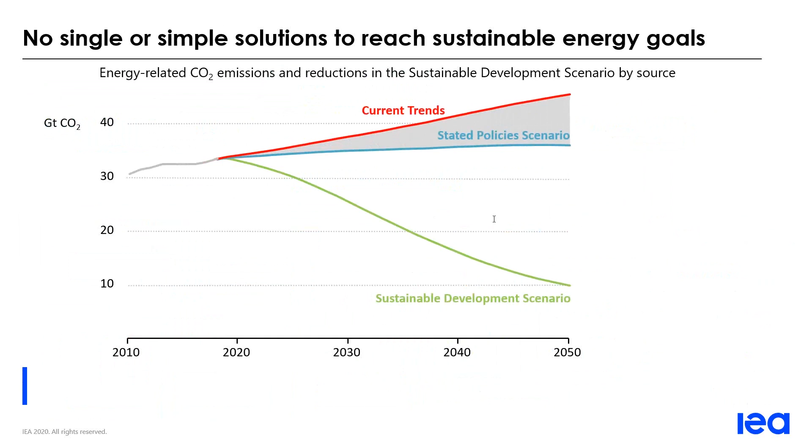Particularly with fuel switching, and moving on to the next slide, is a question of, okay, so what is the impact of shifting this energy demand and electrifying it? I think there's 2 key trends in electrification of demand. One of them came up in the recent Future of Cooling report that we published, is the increasing demand of space cooling and how it will drive electricity demand.

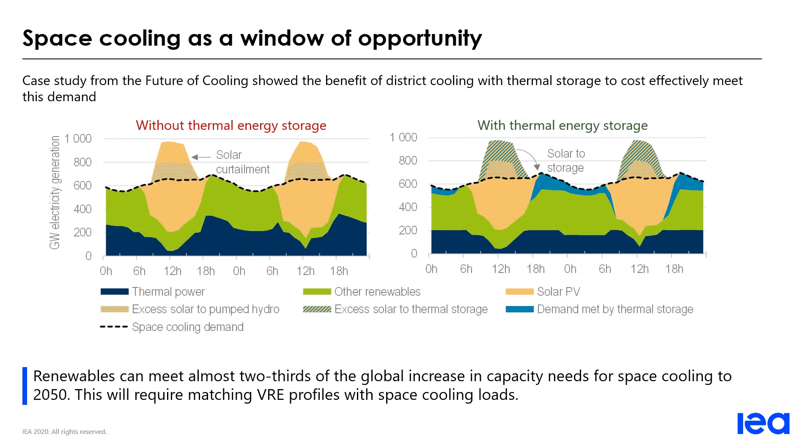So if you take concrete action now, there is potential to identify synergies between increasing demand and increasing penetration of renewables. Of course, this is just one trend in electrification. Now, looking at transport electrification, if we can move to the next slide.

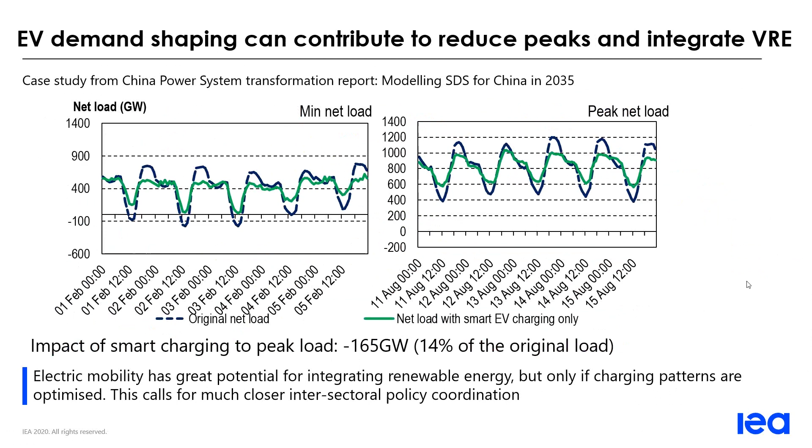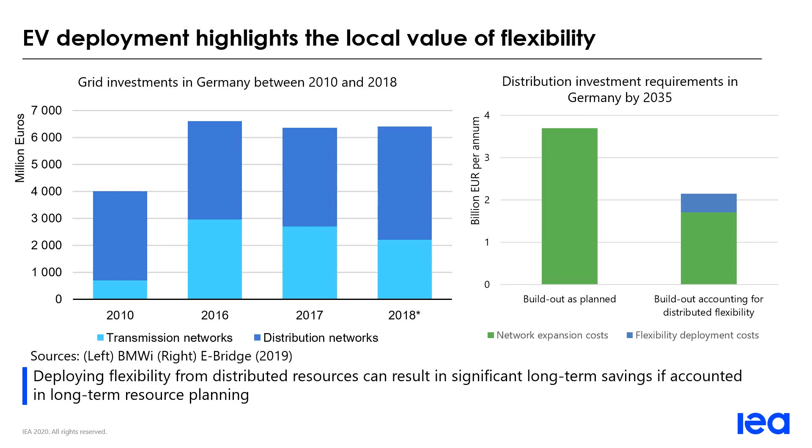And if you break it down to yearly terms, as you can see on the right-hand side, you have a build-out as planned, but you also have an ideal case where you account for flexibility. If you even account for the deployment cost of flexibility, you can reduce the investment requirement by about 44%. Of course, this needs to change the way we plan our networks in the future and the way we recognize the flexibility options in the regulation of network businesses around the world.

But that's something that we'll learn about in the next couple of presentations. Then moving on to the next slide, please.

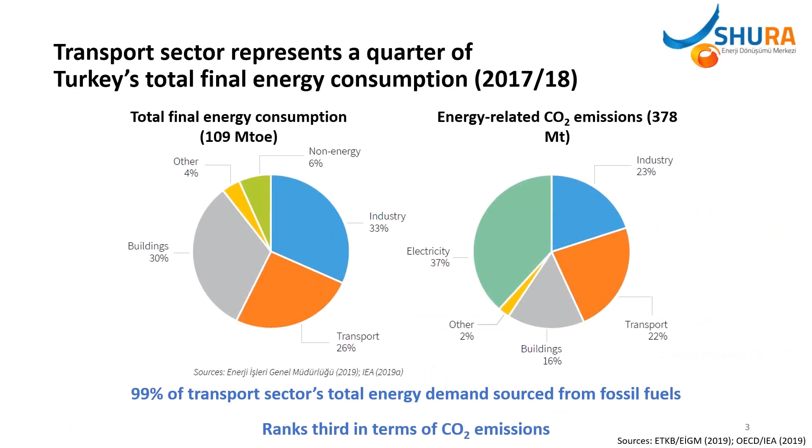And within the G20, Turkey has per capita transport emissions relatively low compared to the rest of the G20 countries. However, in terms of the growth in percent in the past 25 years, it ranks fourth after China, Indonesia, India. So from an emission perspective, it's a rapidly growing country, which will eventually reach other G20 country levels in the coming years. Next slide, please.

In the scope of the study, as I mentioned, two scenarios have been investigated. Only passenger electric vehicles have been looked into. We looked into also 4 metropole and 4 rural regions within 4 distribution grids. As you can imagine, each distribution grid is quite different in terms of characteristic structure, so we chose quite different grid examples for this study. For each pilot region within these grids, we looked into different EV driving and charging behavior possibilities, as well as different charging points, technology types, and locations. We connected this distribution grid modeling with GIS-based modeling to place the charging points in different locations. I'll give some examples of that.

Eventually, we had 16 million scenarios in this analysis because of all these different probabilities, and we boiled that down to 16 scenarios at the end for 4 seasons and 4 full days within each season, split into metropole and rural regions. And we looked into overloading, voltage violation, capacity factor of distribution grids, and additional investment needs to see how 2.5 million EVs can be integrated into Turkey's grid. Next slide, please.

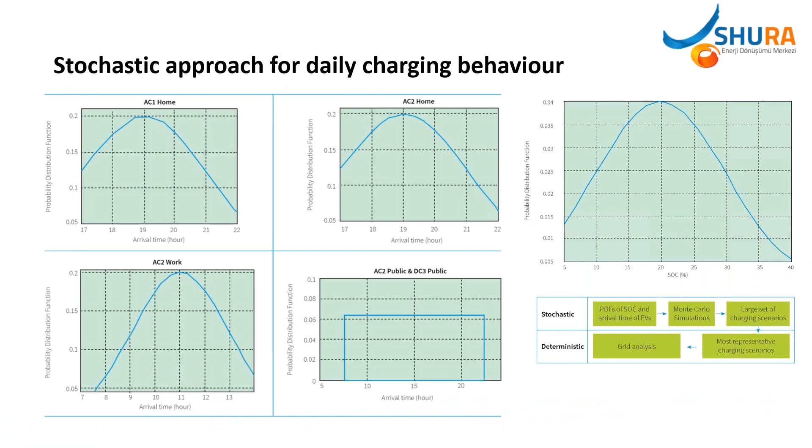And as you can imagine, there is quite a large probability in when the drivers will come home and be able to start their charging, and we have developed a probability distribution function for all charging points, and also made some assumptions on the state of charge, where we assumed the peak will be when people decide to charge when the battery is 20% full. So all these different combinations eventually result in 16 million scenarios, and we made selections out of these 16 million scenarios for seasons and days, and for all different grids to have representative samples for each grid model we had. Please, next slide.

Next slide, please. We've tested the impact of EV integration on the number of problems at the low voltage and medium voltage distribution grid. So number of problems on overloading, number of problems on voltage violation. And you see that, for instance, in Kartal, which is the urban area of Istanbul on the Anatolian or Asian side, there have been 6 problems when there's public charging support, and less when there is home-based charging support.

And in Şile, which is a relatively rural area in Istanbul, there are also several problems. Different problems in different regions. There is no consistent output, but to give a perspective on the number of problems, this is quite a limited number of problems throughout the year one distribution grid could face. So it's actually quite a reasonable and a positive outcome from the perspective of EV integration. And I'll show a bit on the investment side.

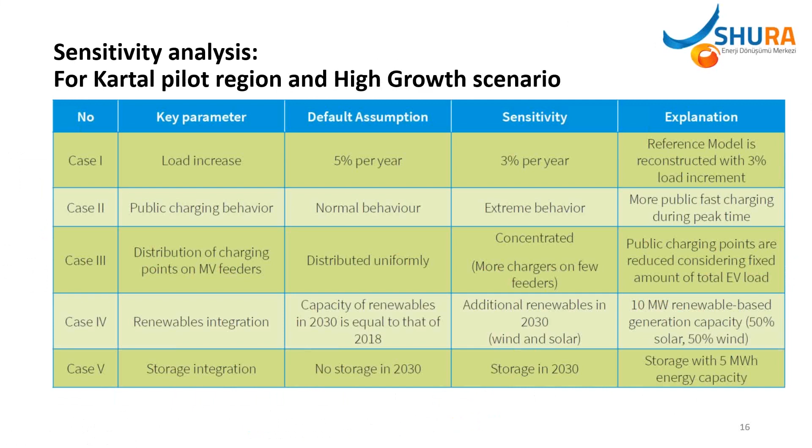Next slide, please. And we did a sensitivity analysis to reduce the electricity load growth from 5 to 3%, so less investments. We grouped the charging stations. We also looked into renewable and storage integration. And if you look into the next slide, I'll try to be a bit quicker here to summarize. Basically, when the demand growth decreases, so there's less investment in the distribution grid, on the bottom you see that the problem number basically doubles.

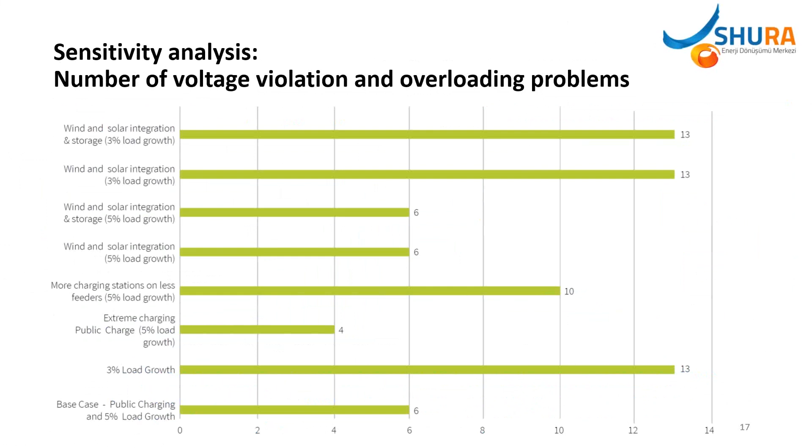One favorable outcome was, if you are to have fewer charging stations at public places and you place them more strategically, it also implies that the charging is done more efficiently and more optimally, so that reduces the problems from 6 to 4. I can go deeper into these results if you have questions. And maybe the next one, and then the next one, please. So let's look at the final results and key takeaways. The next one. To conclude, if you can just click on all of them.

So from this analysis, we were able to draw 7 priority areas for deployment of these in Turkey, primarily for the Ministry of Energy and Natural Resources, but also other public institutions. There's a need to accelerate the market for EVs and charging services in parallel. Smart charging mechanisms, especially home-based charging in the case of the study, were quite favorable for load management. There is no single measure that applies in every region to solve the problems, so region-specific measures are needed.

Different business models will need to be developed for both the charging infrastructure companies and the distribution grid utilities. There is a must to continue the planned investments in the distribution grid in line with the growth in electricity demand. There is a clear synergy which needs to be utilized between renewable energy, storage and EV charging, and from a national perspective, if Turkey wants to domestically produce its EVs, the benefits of this need to be assessed hand in hand. So that's all from the case of Turkey on EV integration. Thank you very much.

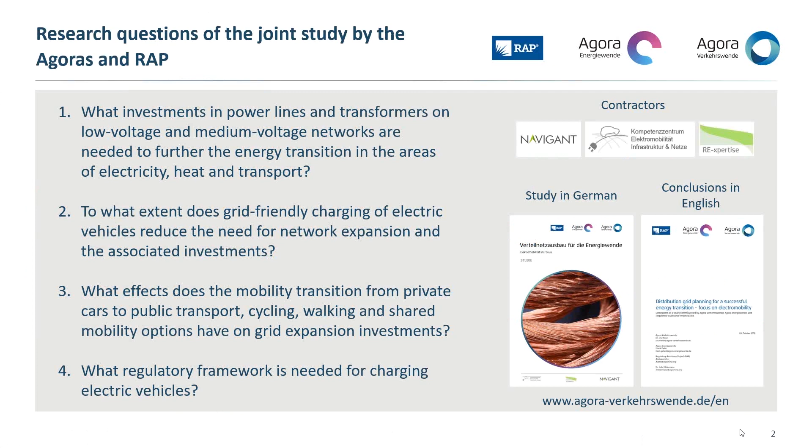And the fourth question, what regulatory framework is needed for charging electric vehicles to really get such a smart charging environment? You can download the study in German, and you can also download conclusions in English from our website.

Next slide, please. So let's have a look at the scenarios. As I said, we can't separate the three sectors, but I will focus on the transport sector. We have two scenarios for the years up to 2030. 6 million battery electric vehicles in scenario F1, 15 million in scenario F2, that is the market ramp up. The government's target is 7 to 10 million electric vehicles. So we wanted to know what even a very quick market ramp up would look like in grid expansion investments. And you see the assumptions as to PV and wind onshore below that, and also to electric heat pumps.

For the year 2050, we then have two scenarios. One where we have a continuation of today's transport system, 45 million battery electric vehicles, which represent the full fleet of cars in Germany, which is currently at 47 million or so. And the other scenario, M1, having 30 million battery electric vehicles, which then also represents the full fleet of cars in Germany. You can't see in this slide that we also have 90,000 buses included in the modeling. What we don't have is the freight transport. So this whole study modeled passenger transport on streets. Next slide, please.

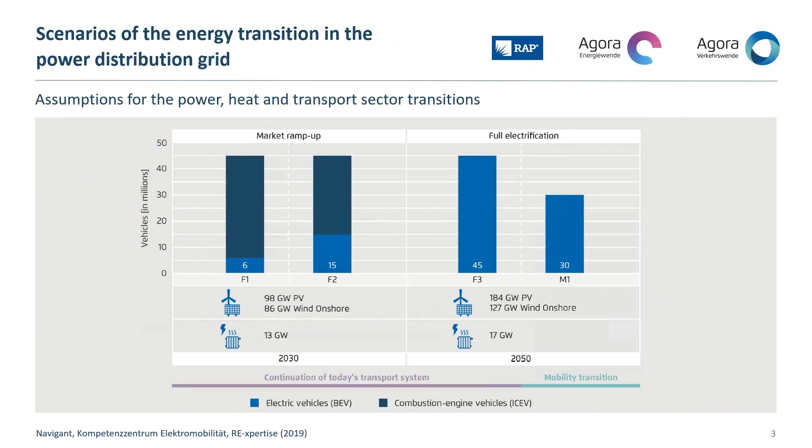This type of simple smart charging means that you can shift the time of charging within one period of parking the car. So if you come home from work at 6 o'clock in the afternoon, you plug your vehicle to the wall box, and the model says that you need to recharge all the energy you used up on your last drive. And the problem then, of course, is if at 7 o'clock, after 1 hour or so, you go to the gym or whatever and take the car, then there is no time for shifting the charging process. So it's smart charging, but it's limited. So that's why we looked at Smart Charging Plus. Next slide, please.

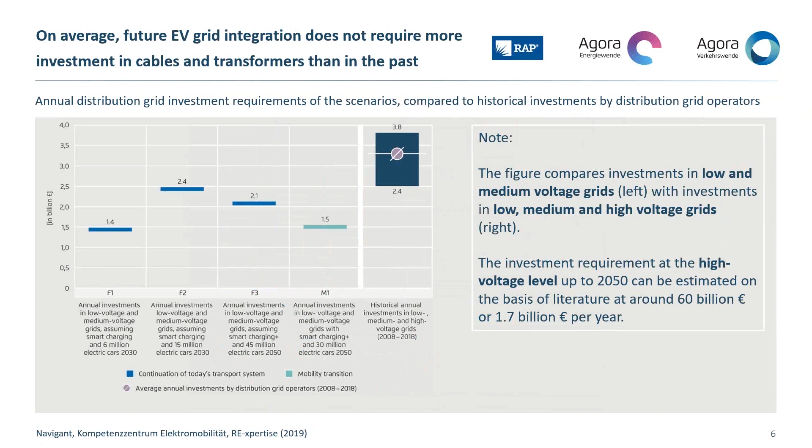So if you want to fill that gap, you can say the investment requirement at the high voltage level up to 2050 can be estimated on the basis of literature at around 60 billion euro or 1.7 billion euro per year. And if you add that 1.7 billion to the 2.1 billion in scenario F3, you get to the 3.8. So we say on average, it is not more that needs to be invested than in the past. Next slide, please.

The next thing we say is electromobility finances the expansion of the distribution grid until 2050. To be more precise, electromobility can fully finance the expansion of the distribution grid in terms of lines and transformers, I'm not referring to information and communication technologies, the smartness actually, for the electricity, the heat, and the transport sector in Germany until 2050. So how do we explain that?

We have 45 million electric cars in 2050, and they increase the electricity sales by around 120 terawatt hours. Today's grid charges are around 7 cents per kilowatt hour. And if you reduce that 7 cents to 4 cents per kilowatt hour by 2050, those 45 million electric cars would bring in up to 75 billion euros, and those 75 billion euros would be needed for the scenario 45 million electric cars with Smart Charging Plus. So it's a continuation of the current transport system, but it's with Smart Charging Plus. Of course, the final contribution of electromobility must be determined politically, which brings me to the next slide, please.

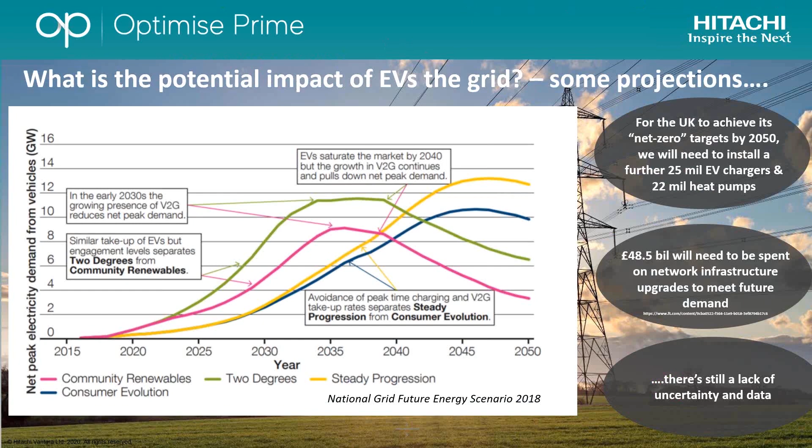And I know there's been other research out there, for example by Capital Economics, a consultancy in London, and their prediction is that by 2050 we'll have to invest about 48.5 billion in network infrastructure upgrades. Now this is for both electric vehicles as well as electric heat pumps. But I think again, ultimately, there's that lack of certainty and there's a lack of data.

Next slide. So from a research perspective, there are really three main questions that we're trying to answer. One of those is around understanding how do we quantify and minimize the impact of commercial EVs? What's the value proposition for smart solutions for both the fleets as well as the private hire operators? And then also what's required in terms of infrastructure, IT, charging, in order to enable this transition. Next slide.

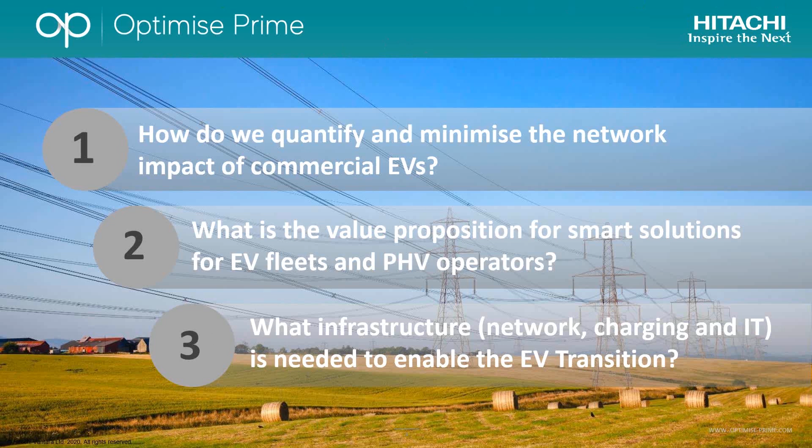So our approach is, we believe we need to take a whole system view in order to really understand these requirements. And by doing that, we need data, we need that cross-industry collaboration from a collaborative ecosystem of partners. We're working with several different partners that I can talk about in a bit, from energy, transport mobility, as well as distribution technology, to be able to openly make that data available to each other.

To be able to address this, we're also utilizing IoT to enable data exchange between siloed areas of activities. IoT also leads to optimized and automatic decision-making, which can result in more benefits at a system level than the sum of the savings at each individual level. Next slide.

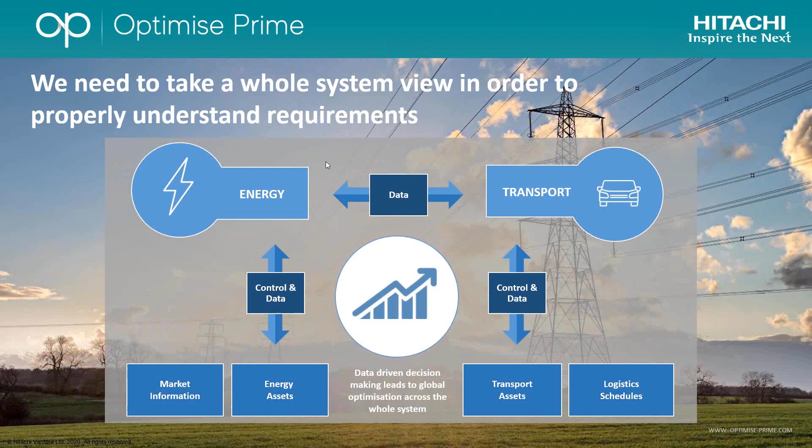So for our depot-based fleet, we're working with Royal Mail. Royal Mail is the largest commercial fleet operator in the UK. They've got over 46,000 vehicles across 1,700 sites. Can you do the next slide?

And what this trial is aiming to do is address several different problems for both the network operators as well as the fleets. And those include customers over-specifying connections and not utilizing network capacity efficiently. They tend to do planning, which tends to be done on a worst case scenario basis. For the depot fleet operators, potential network constraints could result in them not being able to actually electrify their vehicles, in terms of the cost for the infrastructure that's needed for that could cost more than the vehicles themselves. And then also complexity with depot design and planning.

So if you think about Royal Mail, they've got 1,700 sites, and I think originally it took them about 3 years to do 70 vehicles. So if you imagine, with 46,000 vehicles across 1,700 sites, how much time that would take for them to roll this out. This trial, what we'll be doing is we're going to install EV infrastructure at the depots throughout London and the southeast of England.

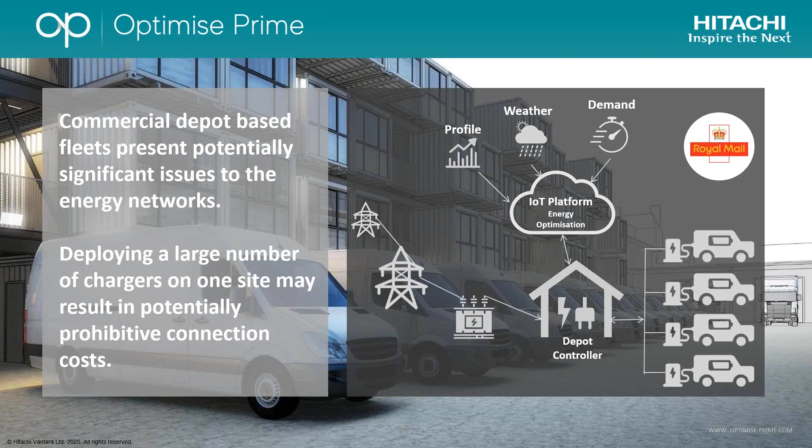We'll implement something called profiled connections that control the amount of network capacity used by each depot throughout the day. And then we're also going to use optimized charging in order to maintain that profile and reduce costs for the depot while ensuring vehicles are charged when they're needed. Next slide. Again, so this is just an example of some of the modeling that we've done. If you can click onto the next as well.

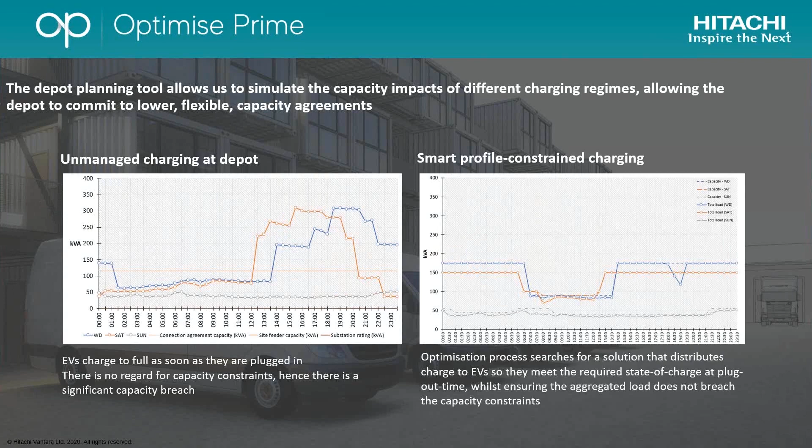Part of this project will also be designing a depot planning tool. So again, trying to simplify that process for the fleets, as well as helping the network operators in terms of being able to respond faster to requests for connections or quotes for connections. And this is looking at different inputs for the fleet operators so that they would understand what type of connection they should be requesting based on their actual usage, based on any type of assets behind the meter solutions that they have that could have impact on that. Next slide.

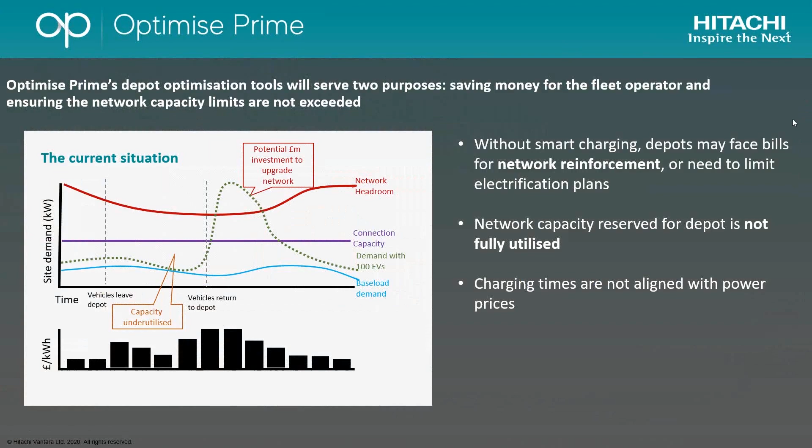So we're talking about the profiled connection. Today, the current situation is most of these organizations tend to base it on a worst case scenario. And if you look at a scenario where they're not using smart charging or they're not optimizing that charge throughout the day to minimize what that capacity demand is: if you look at that red line, that's where the network headroom is. If you look at purple, that's the connection capacity, and the green would be the demand for the EV. So this is an example of 100 EVs that are plugged in at one time. And obviously when you go over that network headroom, that's potentially millions of pounds of network upgrades that the fleet would have to pay. So if we go to the next slide.

So what we're aiming to do with the depot optimization system and the profiled connections would be to look at how the fleets are actually utilizing their vehicles in terms of when they can charge and when is the most effective or efficient time in terms of cost for them to charge and when there's capacity on the network. So this is really looking at two things. It's around helping the fleet operators charge more efficiently, as well as ensuring they stay within the limits of that profiled connection.

Next, please. So the other trial we'll be doing is with Centrica, with the British Gas fleets, and this is going to be for the charge at home. Centrica is the largest energy supplier in the UK. They operate the third largest fleet with about 12,000 commercial vehicles. Centrica will be providing data for vehicles charging as well as EV aggregation services for this trial. And next.

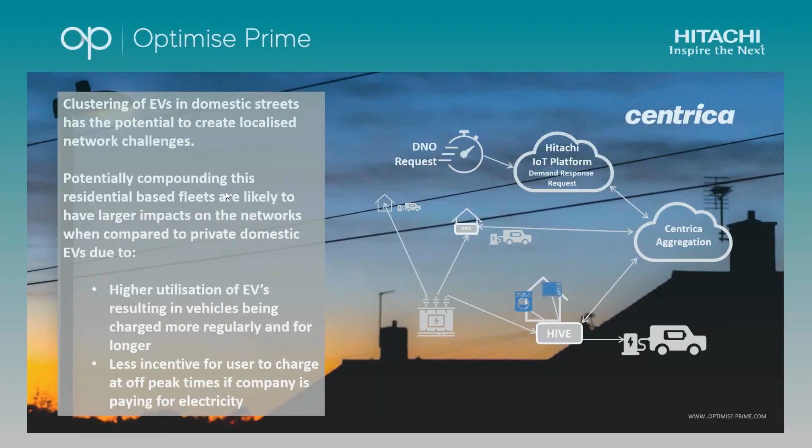So again, some of the challenges that we're going to be trying to solve for the networks and the fleets include the fact that networks right now really don't have visibility of commercial charging on the domestic connections and what impact a commercial load will have on that. So if you could imagine, in a world where, let's say, charging at a depot is too cost prohibitive for organizations, and if they decided to suddenly have all their employees charge those vehicles at home, what kind of impact that could possibly have. And for the fleet operators, there's a complex process needed for employees to claim back charging costs. And another thing too is residential tariffs today are more expensive than the commercial tariffs.

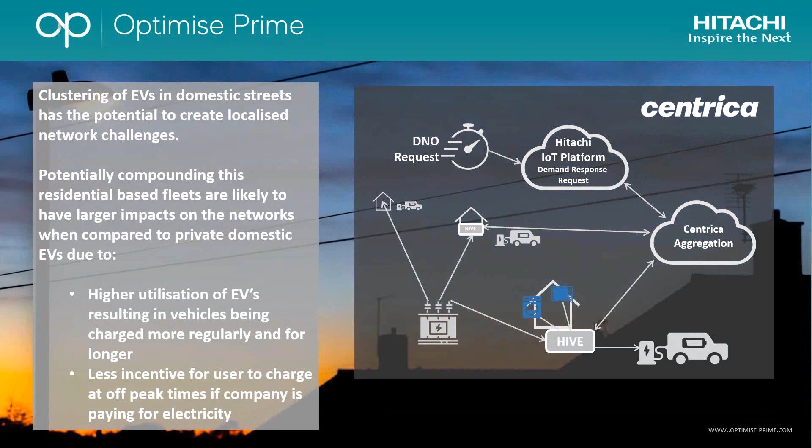So with this trial, we're going to be looking at monitoring charging of home-based commercial EVs to help understand the extent of the issues faced by the networks. We'll be trialing demand response to alter charging patterns when the grid is stressed. And we're also going to look at technical and economic solutions to make it easier to split that commercial and residential power usage. Next.

So the third one is with Uber, a private hire mobility organization, and it's really looking at that mixed fleet. So it's a combination of: they could be charging vehicles at home, they could be largely relying on public infrastructure, where a lot of times, if you look at charging hubs, that can almost act similar to what a depot would be.

Next. And a key challenge for the networks and the operators is that they lack visibility of the potential demand for this really fast growing sector. And for the private operators, they need availability of charging infrastructure.

So Uber's got some aggressive plans in terms of going purely EV in London. In order to do that, they need to make sure that the infrastructure is in place for their drivers to make that transition. The other thing is just understanding what that driver charging behavior is, where they're charging, why they're charging, and how they can help accommodate that better.

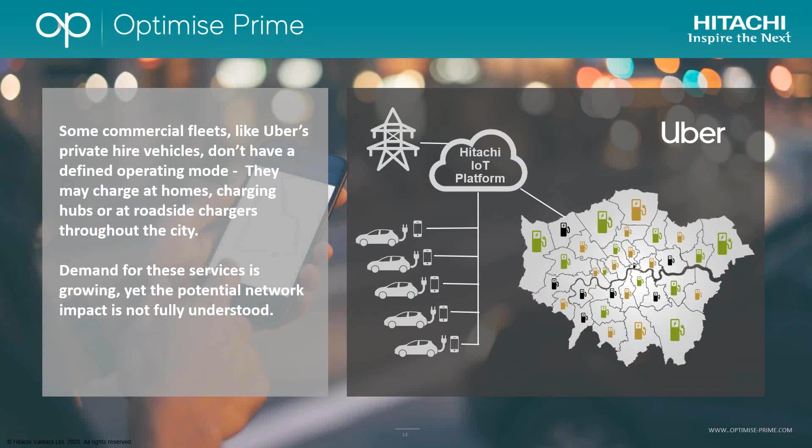So what this trial is going to do is collect anonymized trip data from Uber's EVs across the Greater London area, and then we're going to combine that with the grid data to generate heat maps of charging demand and network capacity. So we're basically looking at what that future demand is and the impacts of private hire or mobility operators, and also understand potential locations for where future infrastructure should be placed.

Next. So in terms of the outcomes that we're expecting, the anticipated benefits of this program, for the UK alone, we're looking at about 2.7 million tons of CO2 by 2030, which is equivalent of a Boeing 747-400 flying around the world 1,484 times. In terms of the network capacity, it's a reduced overall load equivalent to about 1 million homes.

And I think the other key part here is we're also making this data openly available. So this isn't just about benefiting this project. We also want to have an impact on the wider ecosystem and other research projects, as well as other organizations that are looking to develop solutions to accelerate this transition. Next.

So across the trials, these are just some examples of the types of questions that we'll be answering: What are the usage profiles of commercial EVs? What's the impact of the weather, different events? Where can we make preemptive network upgrades? What are the charging hotspots in the city? The impacts of state of charge and how it varies by time and geography. And also what incentives we could use to change behavior, especially around flexibility.

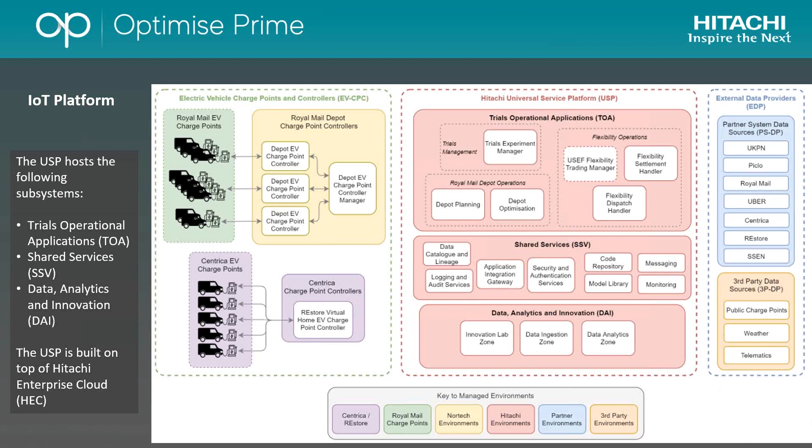And these are the different elements of the platform as well. So we've got the different data sources. I should point out, I apologize, I think I missed that in terms of the partners: this is with UK Power Networks, the lead network operator, as well as Scottish and Southern Electricity Networks, and then our trial partners, Uber, Centrica, and Royal Mail, will be providing data for this project as well.

And then looking at third-party weather feeds, the charging data, and a number of other third-party sources that could also be things like social media, looking at the impact of events. So that's Optimise Prime. Thank you.

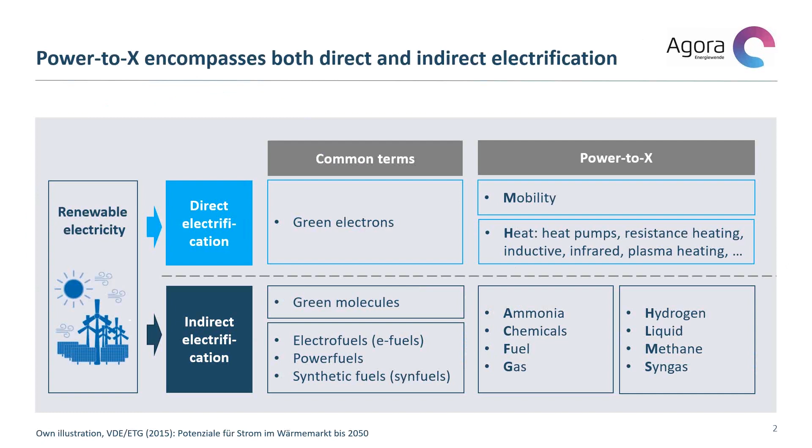And I would therefore argue that power to X is a concept that applies and encompasses both direct and indirect electrification. And along those lines, I will first talk a bit on indirect electrification and molecules and then compare the molecules with the electrons. Next slide, please.

And the big question is, what do we win and what do we lose with including carbon in those molecules? The absolute pro argument is obviously that they come with a very high energy density. And I'll get back to that in a second on the next slide. But the other argument in favor of carbon-containing molecules is that you might use the existing infrastructure for natural gas and liquids.

The big counter-argument is you need more energy or you have higher conversion losses in production of carbon-containing molecules, and you need, in the long run at least, to find a sustainable carbon source. So that might be the air with direct air capture or some form of sustainable biomass, if you have it available. And another big con is methane as a particular molecule with a high global warming potential.

As long as we continue to use methane, even though it might be attractive to use existing infrastructure for natural gas, methane always comes with a risk of leakage. And one very prominent example currently being discussed in Germany among, for example, the combined heat and power community is, well, for some gas motors, it's pretty difficult to avoid this leakage.

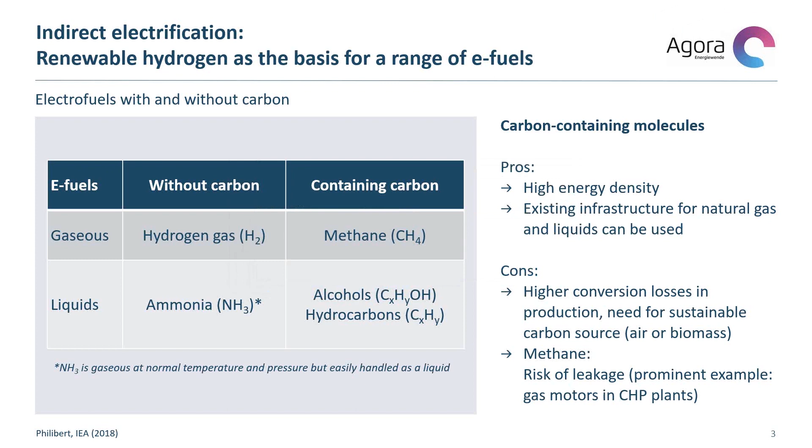If you try to do so, you may have to invest so much and have combustion after your real process that it turns out maybe too difficult and too costly to actually avoid and mitigate those leaking methane emissions. So that's a problem, and that shows that we should very carefully weigh the cost and benefits of including carbon into our molecules. Next slide, please.

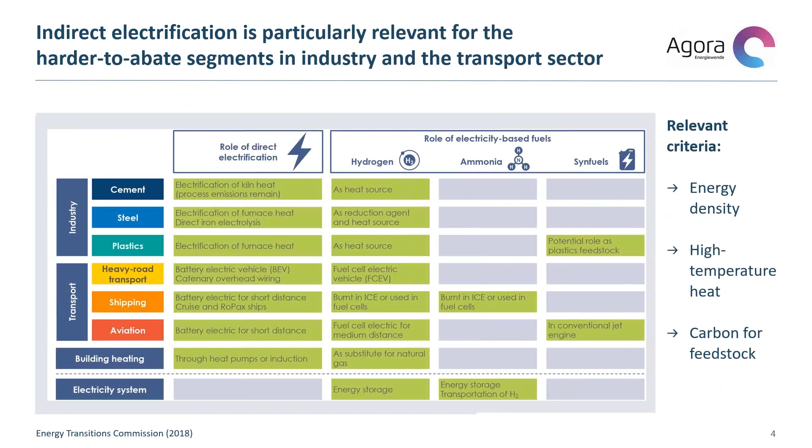And then, final thought is when you need carbon, not for having a fuel, but for feedstock, and you see that in the right part, potential role as plastics feedstock. Obviously, the chemical industry producing plastics needs some molecular source where carbon is contained. And so this is the overview for indirect electrification where we really need it. And then next slide, please.

So the core of this is just to show you some of the figures when we talk about conversion losses. And here I brought you two examples for passenger cars and building heating to compare direct versus indirect electrification. Next slide, please.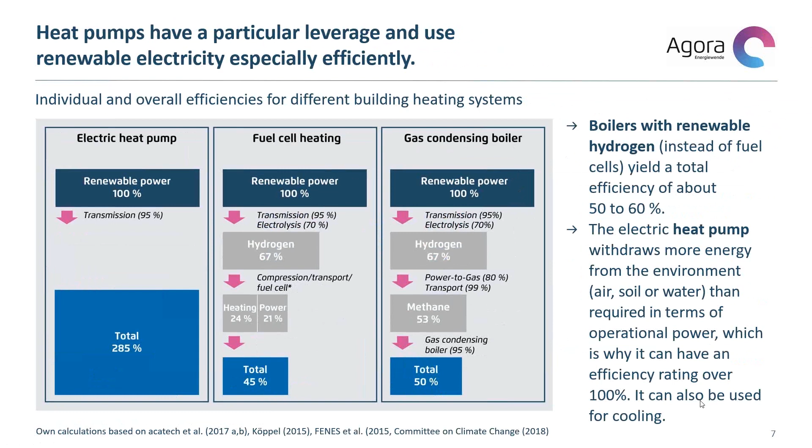Overall, the question of how to make the most of PTX starts with asking what PTX includes. I think it really encompasses both direct and indirect electrification. If we go to indirect electrification through electrofuels, they will play an important role in decarbonizing the chemical sector, industry (think of high-temperature heat), and parts of the transport sector (think of aviation).

But if we talk about passenger cars, battery-driven electric vehicles are the energy efficiency benchmark. For buildings, it's similar. Heat pumps have a particular leverage, and therefore they are also the benchmark, and they can also be used for cooling. And finally, this is all about conversion loss and energy efficiency considerations. This is definitely not the only criterion, but it's so strong that the open question

for some applications, from our perspective, is: can those indisputable physics-based disadvantages of electrofuels be more than offset by avoidance of infrastructure cost? In many areas and regions that's a very open question, and we need very good evidence to find answers. The question always is who has the burden of proof, because the physics is pretty clear about the conversion losses.

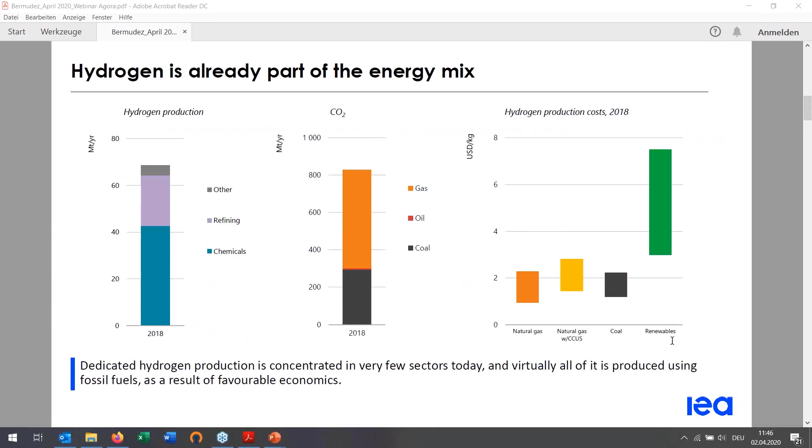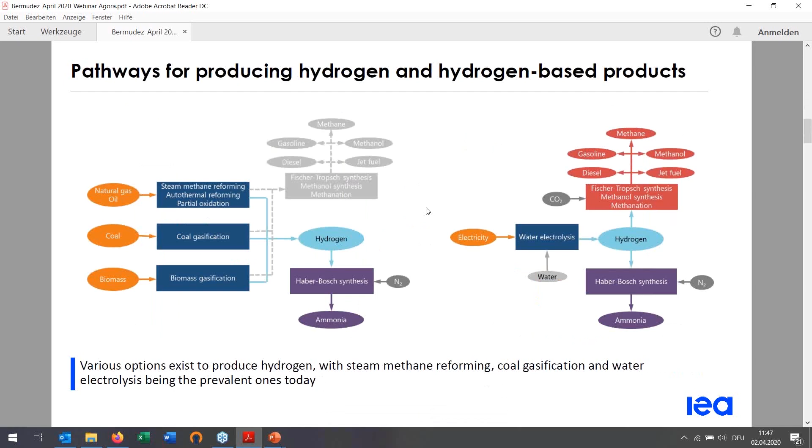The electrolytic routes are costly, as I mentioned, but despite the cost challenges, scale-up is happening for hydrogen production from electricity. Since 2000, we have seen over 200 projects start operation around the world. This is especially marked from 2010, when there was an acceleration in the number of projects deployed. Moreover, these projects are getting steadily bigger. For example, last month, the largest power-to-hydrogen project was inaugurated in Japan with a scale of 10 megawatts. And projects being announced today are as big as 100 or 200 megawatts, compared to an average scale of around 1 megawatt in the last decade.

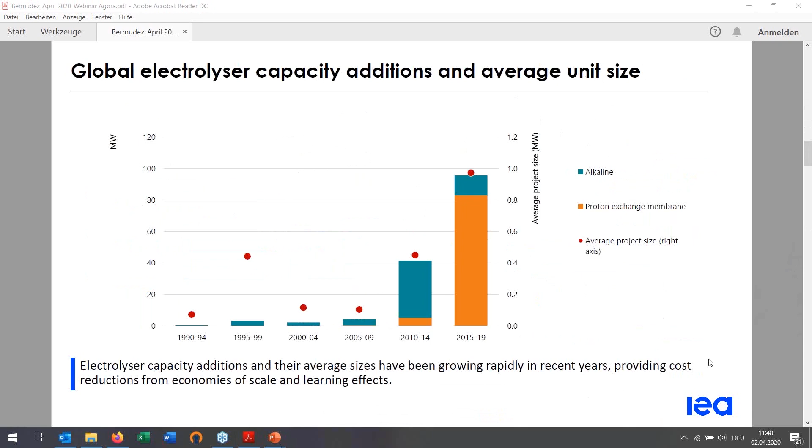The operative management of electrolyzers also presents challenges. In grid electricity, electricity prices vary over time. We have low prices when there is little demand and there is a surplus of variable renewable electricity generation, and high prices when demand is high and there is less variable renewable electricity available. Although very low or even zero electricity prices may appear as a very attractive way of producing hydrogen, these typically occur only for a few hours a year, resulting in low utilization of the electrolyzer and thus relatively high production cost due to the impact of CAPEX.

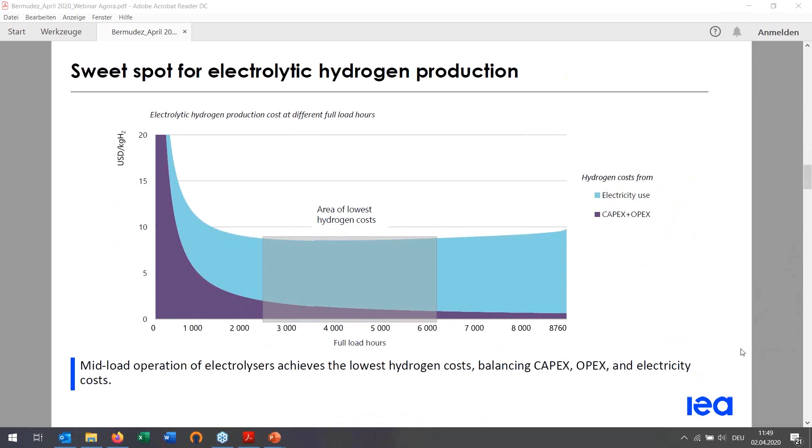However, even with optimized operation conditions, the price of electricity is and will remain the main cost driver for electrolytic hydrogen competitiveness. From the analysis that we performed last year, it was determined that low electricity costs in the range of $10 to $40 per megawatt hour are required for electrolytic hydrogen to become competitive against hydrogen produced from natural gas with CCS, when we consider a conventional range of natural gas prices. The introduction of carbon prices would enable competitiveness of electrolytic hydrogen with higher electricity prices, although the impact of CO2 penalties on the price of hydrogen from natural gas when it is coupled with CCUS is relatively low.

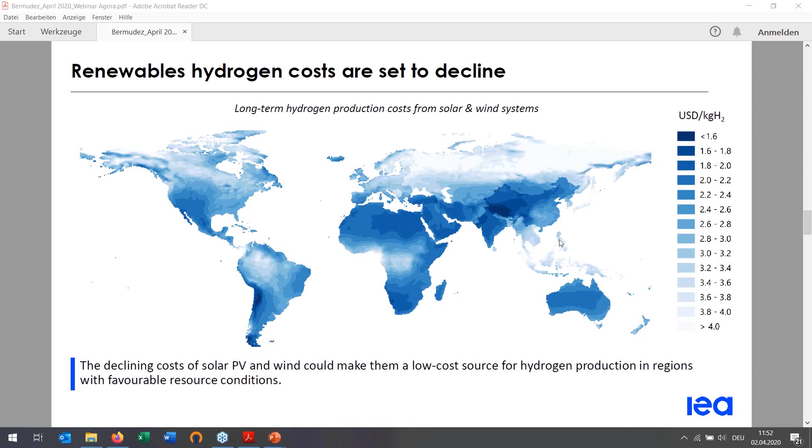Now let's focus on some opportunities for hydrogen to contribute in systems integration. If we think about integrating variable renewable energy, we know that it requires flexible electricity systems, and this will require large-scale and long-term storage, especially in the future, even more in particular in regions with strong seasonal patterns of renewable supply like Europe.

Batteries attract a lot of attention these days. For lithium-ion batteries, the energy loss of a full storage cycle is very low, so efficiency is around 85%. Therefore, they are well suited for short-term storage and many storage cycles. If we think in long-term storage, the levelized cost of electricity storage increases since more storage volume is needed.

In the case of hydrogen and ammonia, they have quite low cycle efficiencies, around 40%, resulting in very high cost for short-term storage. However, the costs for the storage volume are very low, so the cost when moving to long-term storage increases only slightly, making hydrogen and ammonia a lower cost option in this analysis for a storage duration longer than 2 days.

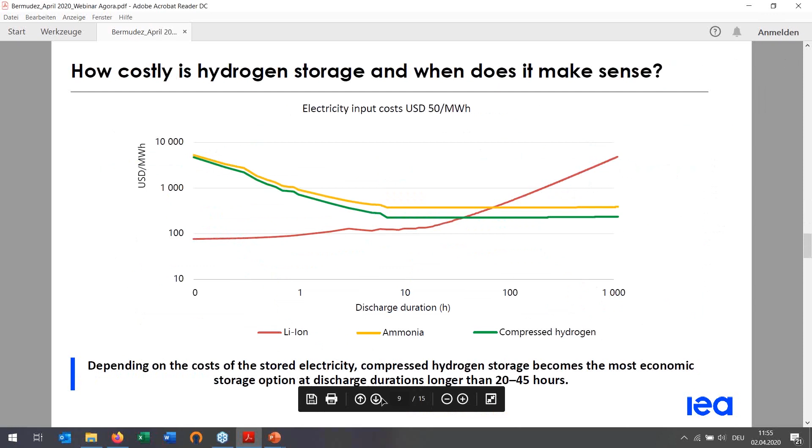Next slide. No, the next slide, please. Next one. That one.

So finally, another alternative regards hydrogen-derived products. Synthetic hydrocarbons and ammonia offer an interesting opportunity to decarbonize certain transport modes like aviation and maritime, where hydrogen has limited applicability due to its low volumetric energy density. However, the production of these fuels involves a complex value chain that comprises several processes, one after the other, and along this value chain, efficiency losses are accumulated, resulting in low overall energy efficiencies, which will lead to high production costs.

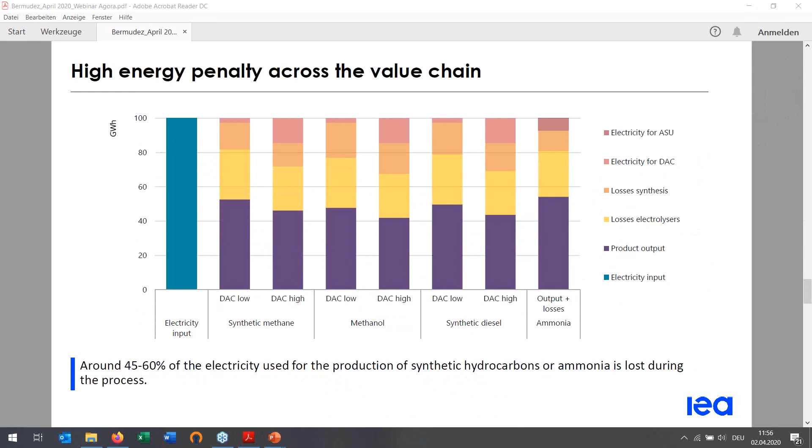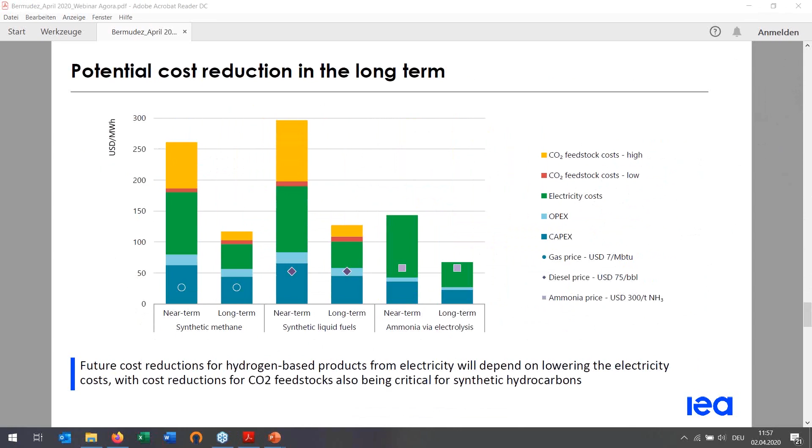I would like just to finish with the 7 key recommendations that we identified in our report for scaling up hydrogen, which are establishing a role for hydrogen in long-term energy strategies, stimulate the commercial demand for clean hydrogen, especially in those sectors that are already demanding hydrogen, so trying to replace current demand with low carbon hydrogen. And address investment risk for first movers, because the first movers are going to face quite important costs that will involve a lot of risk.

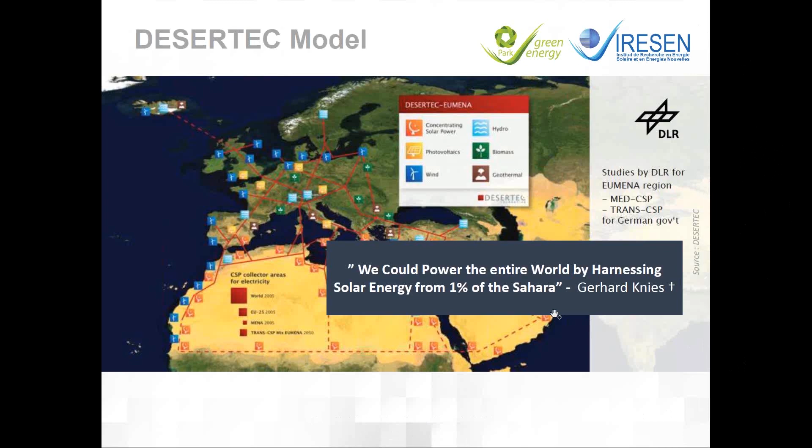But the idea that I want to highlight here is that now, as the previous speaker has spoken about, we would like to review this vision of Desertec to another version that will be more inclusive for countries on both parts of the Mediterranean, but also with more added value in the south of the Mediterranean. Next slide, please.

So, about the vision: we in Morocco would like, hopefully in 10 years, to be one of the leading countries exporting high added value green or industrial molecules. We find this vision quite realistic because of the urgency of climate change. So we think there is a very convenient context now for deploying this economy at larger scale.

We have also very consistent signals that Power-to-X is considered by many countries such as Germany or the Netherlands as a very quick way to achieve zero emission targets. And this will probably create positive conditions for the deployment of the international market.

Morocco also has nice renewable potential, as shown by previous speakers. We would like to position ourselves as a key partner for countries that would like to deploy or import PTX products. Next slide, please. So what about the local context?

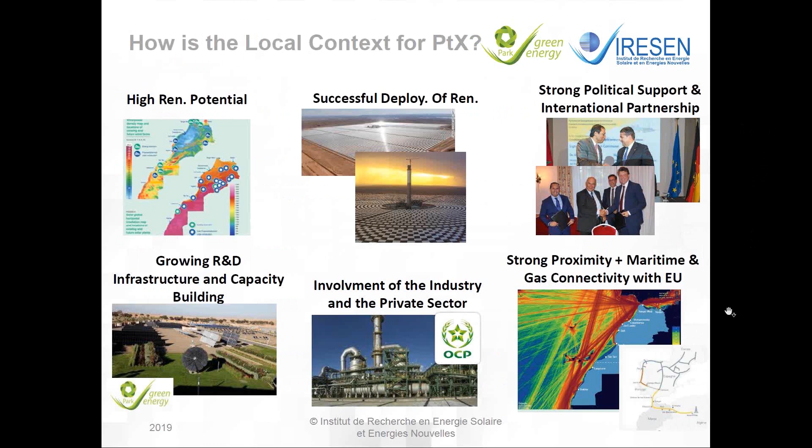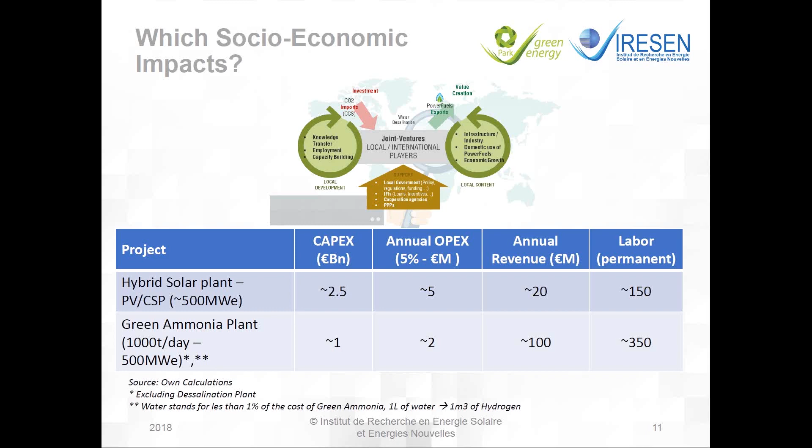So this is why we believe that the deployment of a Power-to-X industry in Morocco may be very positive in terms of socio-economic impact, in a country that has a lot of youth in its demography. Next slide, please.

Next, please. So now the first and next steps that were endeavored, and in here I would like to also highlight the support of the German government via, as I said, the PAREMA program, and also colleagues from the GIZ, the German Cooperation Agency, with which we have impulsed and carried out 2 preliminary studies back in 2018 that were shared internally here in Morocco with the stakeholders

in 2019. One study was about the technologies of power-to-X, and the other one is about, let's say, the market or the economic potential of a power-to-X economy here in Morocco. Those studies were presented back in 2019 in a workshop that gathers, as I said, all the stakeholders of the energy sector.

And then the Minister of Energy that was chairing the session by that time decided to create a Power-to-X National Commission, which will then steer the activities that will be done for Power-to-X in Morocco. And the minister decided as well to launch a more in-depth study to produce a roadmap for Power-to-X in Morocco by 2040-2050.

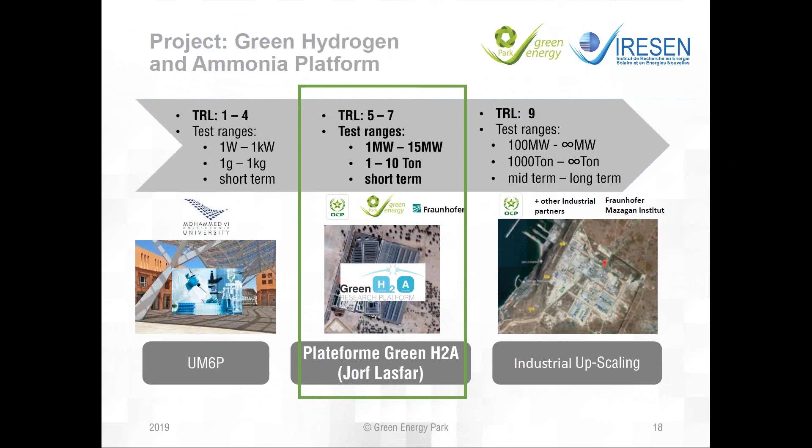Next slide, please. So in terms of TRL, those are details, but we would like, as we have developed these platforms previously on the Fraunhofer model, to bridge the gap between the academia in terms of TRL and also the industry. Next slide, please.

So this is just to situate a little bit where the project, the platform, will be. We know, as I told you, the main potential is mainly to the south for wind and PV. However, we have chosen a site that is the industrial site of OCP, which is one of the biggest chemical plants in terms of fertilizer production in the world.

And the idea is also to be safe, to have an off-taker, and also for safety, because this chemical compound manages, as I told you, around 2 million tons of ammonia per year. So they are really used to manage ammonia. This is why we would like it to be in the chemical plants. This will also be approximately similar to the platform of Fraunhofer IMWS that is under development now in the Leuna industrial complex near Leipzig, Halle.